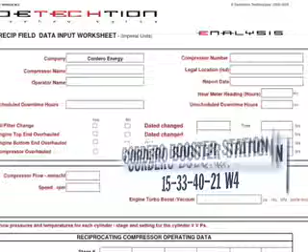Upon arrival at the compressor site, the unit number, compressor name, production area, and unit location should be recorded on the form. This information should never change unless a compressor has been moved. The overhaul hours and downtime hours should be recorded. These hours and dates are typically taken from the compressor logbook.

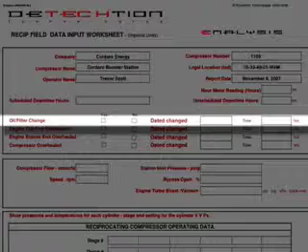The data required includes the hour meter reading for the unit, any scheduled and unscheduled downtime hours since the last report, date of the last oil and filter change, date of the last top end overhaul, date of the last bottom end overhaul, and date of the last major compressor overhaul.

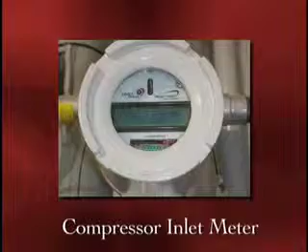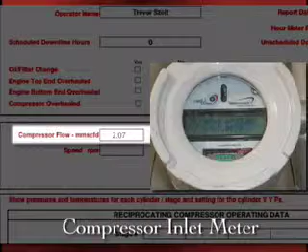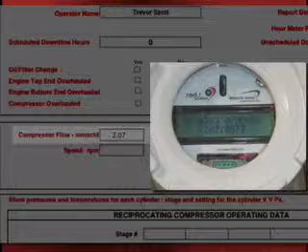The compressor flow is the inlet volume to the compressor, which should be read from the inlet meter on site. This should be the instantaneous flow at the time of your readings and not the average daily flow from the day before. If an inlet meter is not present, or the meter at a plant location is for more than one compressor, an estimate of the expected flow through the compressor should be recorded in this field. It is important to note that the eNalysis program does not require an accurate flow measurement to perform all of the necessary diagnostic calculations.

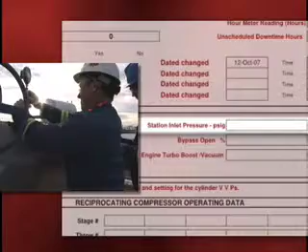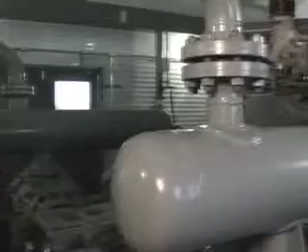The station inlet pressure is the pressure at your inlet header located at the furthest point upstream of the first stage of compression. This pressure can be read from a pressure gauge or with the use of a digital deadweight gauge. If this pressure is not available, then enter the current stage 1 suction pressure into this field. The speed is the operating speed of the driver. The eNalysis program will automatically take into account any gear increaser or reducer between the driver and compressor.

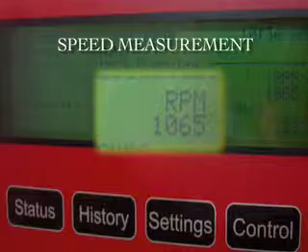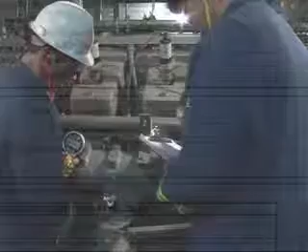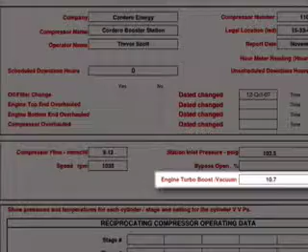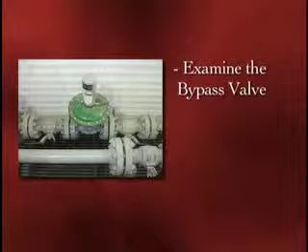The engine turbo boost is the current manifold pressure on the driver. This pressure can be recorded using a variety of units of measure, as long as the units used are recorded on the field data sheet. The engine turbo boost can be trended against calculated horsepower use, which in turn is an effective indicator of the health of your engine. Examine the bypass valve and record the percentage that it is open. On some units there is a digital or analog gauge, but if not, then an approximation of its position is fine based on visual inspection of the valve.

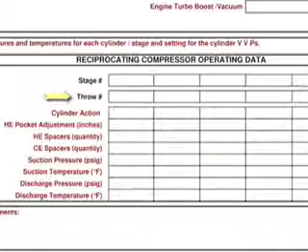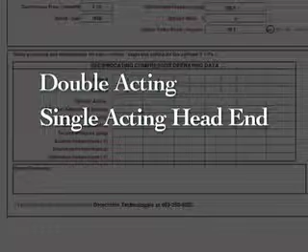The bottom half of the field data sheet is where the actual operating conditions of the compressor are captured. On a reciprocating compressor, the field data is collected and recorded for each cylinder individually. Record the stage number and throw for each cylinder. The cylinder action must indicate the current setup of the machine, indicating whether each cylinder is double acting with all valves installed, single acting on the head end, single acting on the crank end, or non-acting with all suction valves removed.

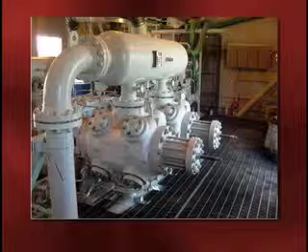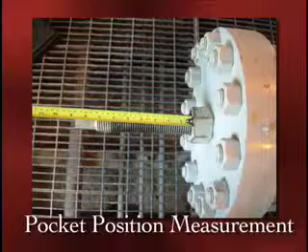The head end pocket adjustment is the amount that the head end pocket is open. To determine the pocket position, it is best to screw the pocket fully closed while the unit is down and record that position on the pocket threads with spray paint. The pocket position is recorded as the distance from this mark to the reference point. The head end and crank end spacers are the number of valve spacers or split yokes that are currently installed under the suction or discharge valves on either the head end or the crank end of the cylinder.

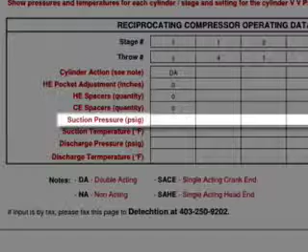The suction pressure for each stage should be recorded from the suction pulsation bottle or as close to the suction side of the cylinders as possible, as there can be orifices, valves, or suction screens which may induce significant pressure drops, causing erroneous results on the E-Analysis report.

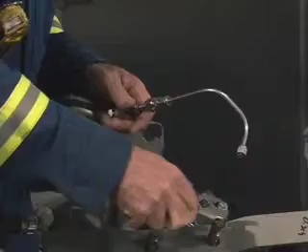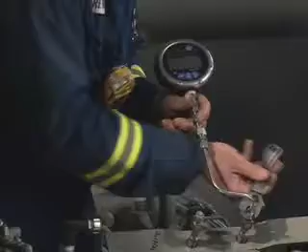The discharge pressure should be recorded from the discharge bottle using a digital deadweight gauge as mentioned earlier. These pressures should be measured using a digital deadweight gauge for best accuracy. In order to facilitate the collection of the pressure readings, many Detechtion clients have built a manifold onto their control panels with appropriate tubing, valves, and quick connectors to take all of the required pressure readings with a digital deadweight gauge. If this is not possible, then the pressures should simply be recorded using traditional panel gauges.

If you would like to learn more about the benefits of using digital deadweight gauges, please review the Compressor Tech Tip dated December 15, 2006, found on our website.

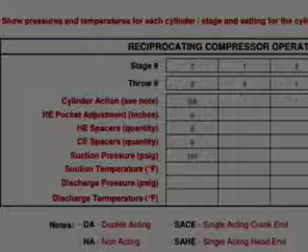Temperatures should be taken with an infrared heat gun on a dot of flat black paint provided by Detechtion's engineers at the time of audit and initial setup of your compressor on the E-Analysis system. Paint color can affect the readings on your gun by as much as 50 degrees Fahrenheit. Heat guns are calibrated to record the absolute temperatures of black bodies, which is what our system requires.

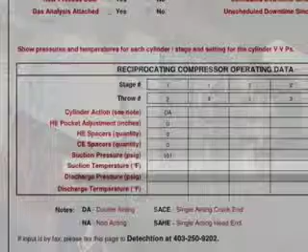The suction temperature should be taken on the piping upstream of the suction bottle as marked by the black paint dot to reduce the effects of thermal conductivity from the cylinder and the effect of any heated gas that has slipped back through damaged suction valves up into the bottle. If no suction bottle is present, then the temperature should be taken 4 to 8 feet upstream of the cylinder.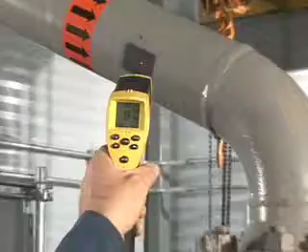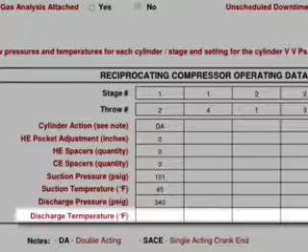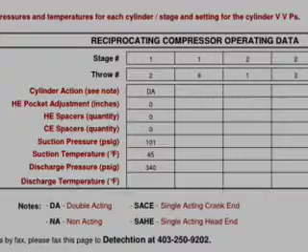The discharge pressure should be recorded from the discharge bottle using a digital deadweight gauge as mentioned earlier. The discharge temperature should be taken using an infrared heat gun on the neck between the cylinder and the discharge bottle. If there are multiple cylinders on one stage of compression, it is critical that discharge temperatures are recorded for each of those cylinders.

The completed field data input worksheet is now ready to be entered online for the E-Analysis report to be instantaneously generated. When you log into the E-Analysis website, you must first select the style of compressor you are submitting data for by choosing either the Recip or Screw tab at the top right of the screen.

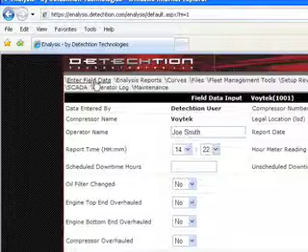Next, you must search for the specific unit you are going to enter the data for. This is done by clicking the search button at the top of the screen. The unit can be searched for by unit number, unit location, compressor name, or serial numbers. Once the unit has been selected, click the Enter Field Data link and a form will come up that is similar to the layout of the Field Data Input worksheet. The data can then be entered by filling out each of the fields on the website.

It is critical that the fields are entered using the correct units of measure, whether they be metric or imperial. If the field data has been recorded using metric for some measurements and imperial for others, the units can be toggled during the input session using the Current Unit Selection button. Using this toggle, you can convert that data by switching the Current Units button to the units of the data that needs to be entered, entering the data, and then changing the Current Units button to the correct units for the rest of the form.

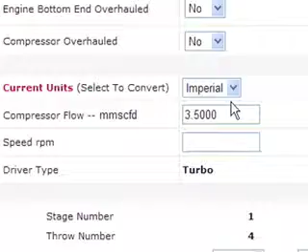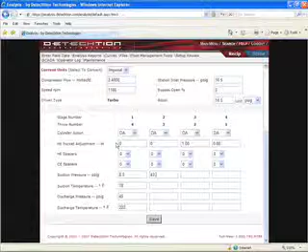In order to speed up the data entry online, the Tab button on the keyboard can be used to advance between cells on the field data entry page. Once all data has been entered on the form, the Save button must be clicked, and an E-Analysis report will be generated within 2 to 5 seconds for you to review.